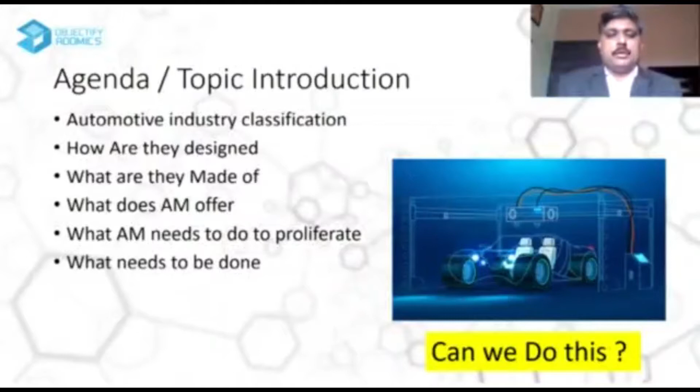In the next 20 minutes, we would be discussing what are the demands of the automotive industry, what does AM offer, what are the gaps, and how we can overcome these gaps.

To understand the requirements better, here we have shown a classification of the industry. This is a non-conventional classification where there are three segments: mass market, luxury market, and sports. This classification can be applied to industries from bikes to trucks. However, examples of cars are shown as it is easy to relate with them.

Each segment has its own requirements, and luxury market and sports requirements are more amenable to 3D printing. However, the mass market is where the volume lies. Hence, we would be going in detail into the mass market industry.

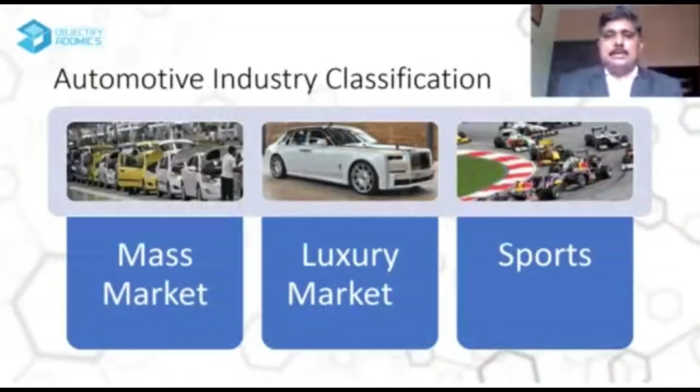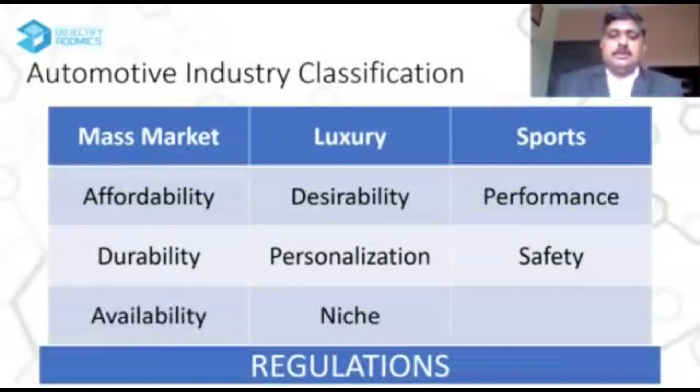These requirements shown here for each segment are applicable to all industries. However, if we pick the top three for mass market, they are affordability, durability, and availability. The whole industry is regulated, and any new designs or changes need to meet these regulations, both prevalent and upcoming.

To deep dive into mass market cars, how is affordability ensured? It is ingrained in the design and is ensured by exploiting the economies of scale, where high initial costs are distributed over larger volumes. Availability is ensured by rate of build, which is in multiples per minute.

If we take the example of the car industry in China, 46 cars per minute are produced. This is the build rate requirement. The build rate is supported by the supply chain model, where the parts are distributed over multiple suppliers who make these parts and supply them to the top tier OEMs.

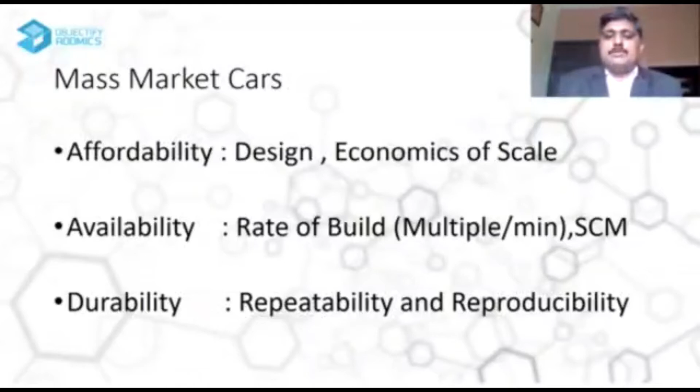Durability is ensured by the repeatability and reproducibility of the mass manufacturing processes. They deliver specifications consistently, which evolve over an iterative cycle of design and testing.

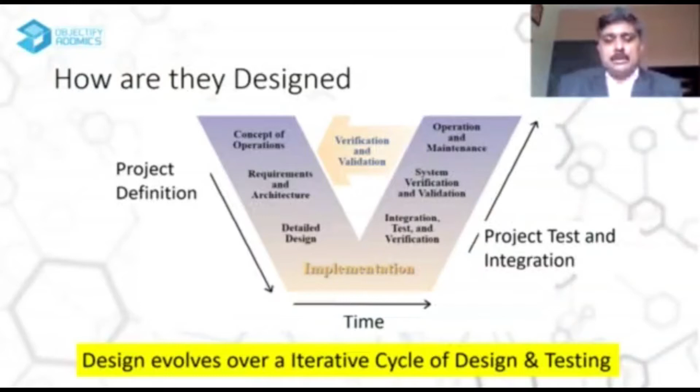In the project definition stage, the concepts of operations evolved are detailed into detailed designs. Parts are made as per these detailed designs and are tested at part level, subsystem level, and system levels. Finally, it is checked whether the concepts of operations are delivered, and the process iterates until then.

So what does an automotive vehicle constitute of? If we consider the classification as per weight, 80% of them are metal and 20% parts are plastics. Also, for plastics, the conventional materials like PA, PP, PC, ABS are not available in the 3D printing industry.

By this, what do we mean? The materials available in 3D printing are not exact representations of the properties of the conventional materials.

When we come to metals, these are primarily hot rolled or cold rolled sheets, castings, or forgings. They are primarily ferrous. Only in areas where weight saving is important and the loads allow, aluminum is used. The powder metallurgy and the composites have applications in very niche segments of high-end vehicles.

The final parts are made either by the stamping process or the machining process or the various joinery processes like welding or assembly, where the parts made are assembled. The key takeaway from the slide is that the materials and processes are aligned to the objective of fit-for-function parts, meeting the cost economics and numbers for the build rate requirements.

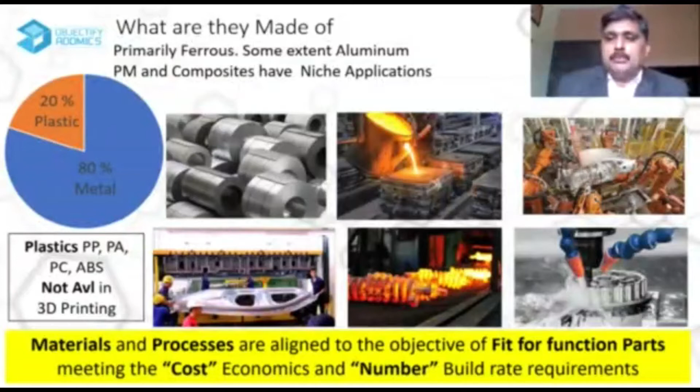Now, why are we looking at this slide? Over the next slides, you will understand how strong points of conventional engineering create constraints for DFAM. So what are the strong points? We start with legacy design.

If you look at these parts across all OEMs, the shapes are similar. They are customized as per the application of mounting and the loads. This concept of design rules, the processes that have evolved over multiple years, in fact thousands of years, have led to an intelligence which has created the design rules.

These design rules are used in terms of process constraints, and they govern the shape of the component to a greater extent. If you look at the SCM model, when the parts are distributed over the suppliers, in some cases suppliers also design those parts. So they own the IP of the parts.

So a car is necessarily an interlinked system of parts. And when these parts are owned by multiple OEMs, bringing in change becomes difficult because we have to interlink many stakeholders.

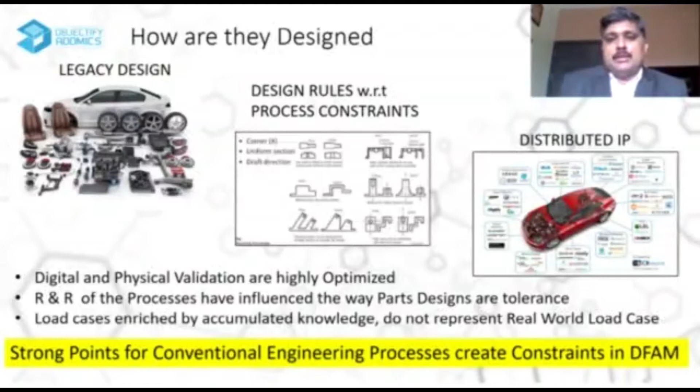So in summary, all advantages of conventional design have led to optimization in digital and physical validation. The load cases have got enriched, and you only check where there is a possibility of failure, so the load cases don't represent real world load cases. The tolerancing and dimensioning schemes are also made in sync with the process quality achieved by conventional processes. So there is an investment required here if this has to be made amenable for 3D printing.

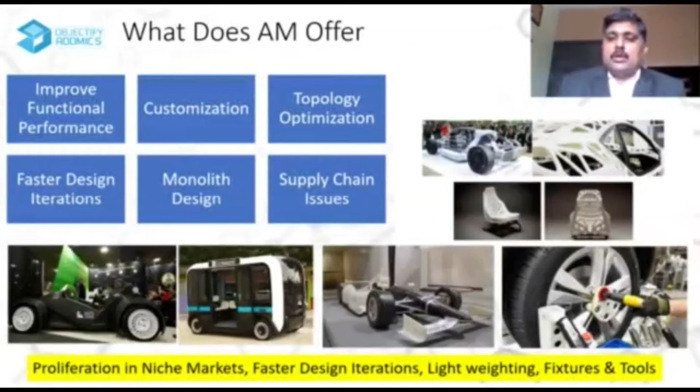For evolution of concepts of lightweighting, the additive manufacturing characteristics of topology optimization and monolith design help a long way in evolving the concepts. The tooling industry and the fixturing industry have adopted additive manufacturing, and so has the automotive industry, where toolings and fixturings are used.

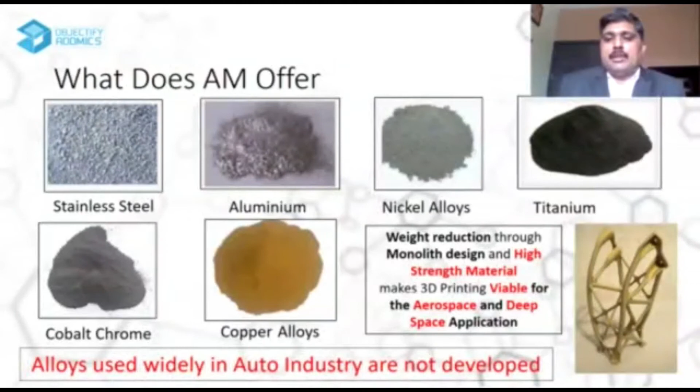If we look at what AM offers in terms of material and compare them with conventional materials, we find there is a huge gap. Most of the alloys used in the automotive industry are not developed in the AM industry. Why are high strength materials developed? These high strength materials aid in making monolith designs, which help in weight saving, which is a key cost and timeline driver for the aerospace and deep space applications. Hence, there are proliferations in that industry.

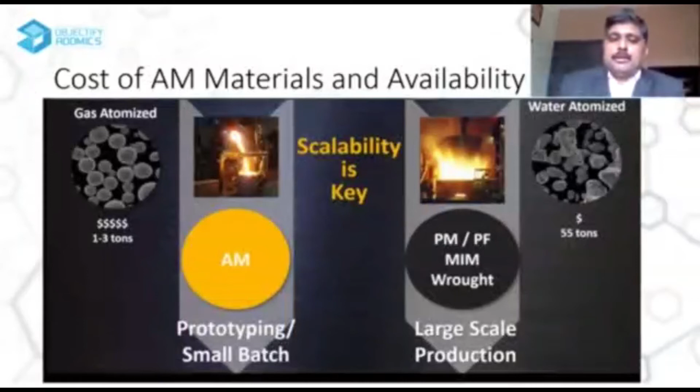If we look at the cost of materials and their availability, the process governs this. What do I mean? The current AM processes demand gas atomized powders, which are 5 times costlier than conventional powder metallurgy powders. Also, this gas atomization process is a prototyping or small batch process. So if the complete automotive industry shifts to AM, can this ecosystem support the number requirements? The answer is probably no. The high cost and high delivery ecosystem of raw materials needs to evolve into a more feasible model for the auto industry. The cartelization in powder manufacturing and machine manufacturing needs to go away.

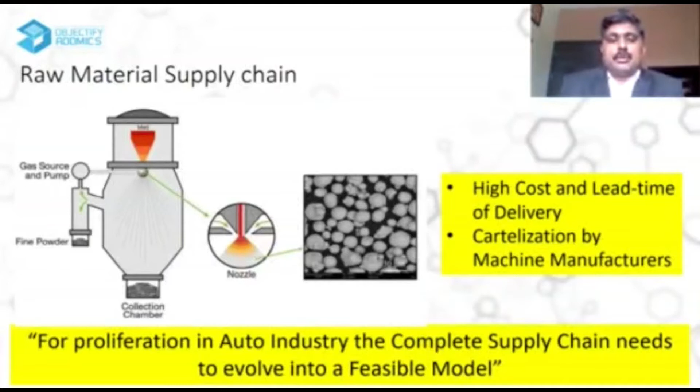If we look at the requirements of build rate and cost of the automotive industry, AM cannot meet these requirements currently. The initial costs of the equipments and their operating costs are very high. Also, the build rates are very slow because most of the systems depend on point-to-point curing by laser beam, which takes a lot of time. It takes hours to print the job.

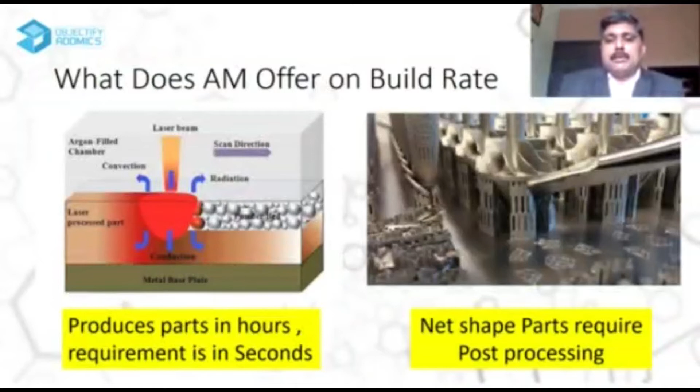Even after this, the parts that are made are near net shape and require extensive post-processing. This post-processing is a huge roadblock in 3D printing adoption. It breaks the digital chain that starts with digital design. In fact, it negates all the advancement in terms of unified software and the building of parts by multiple lasers, whether it's quad lasers, or some OEMs trying to bring in even 12 lasers. All that gets negated as finally you still have to do the post-processing.

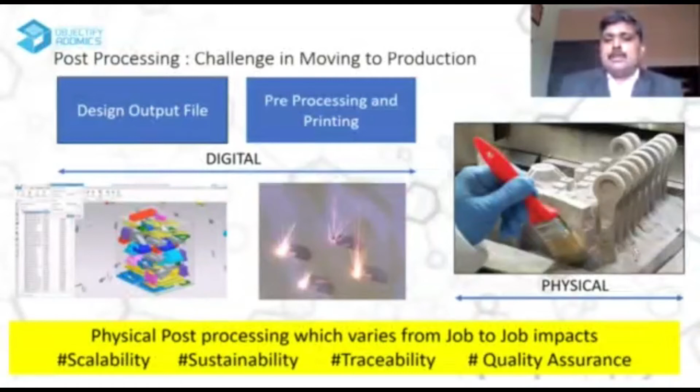This post-processing, which varies from job to job, impacts the scalability, sustainability, traceability, and quality assurance of the 3D printing process. The complexity of the AM process is also inhibiting its spread. In conventional design, you break down complex tasks into small tasks, whether in design or manufacturing, whereas AM success hinges on making complex parts.

These complex parts are made by complex processes. These current processes are highly complex and subject to even small variations in variables like powder quality, temperature, inert gas environment, build resolution, support structure, and so on. The complex part made by complex processes needs extensive testing and verification. The space and aerospace industry are aware of the extent of qualification they need to do for using these parts. Further, this qualification itself, once done, is subject to the machine, material, and build process.

There needs to be a huge investment in this to bring in universality. What do I mean by this? Suppose you have a part design and it is made by a particular process in USA, and if it is made by the same process in India, we should get the same result irrespective of the machines used. The complexity further increases by the need of different softwares at each stage. The unified software system needs to evolve to make the ecosystem feasible.

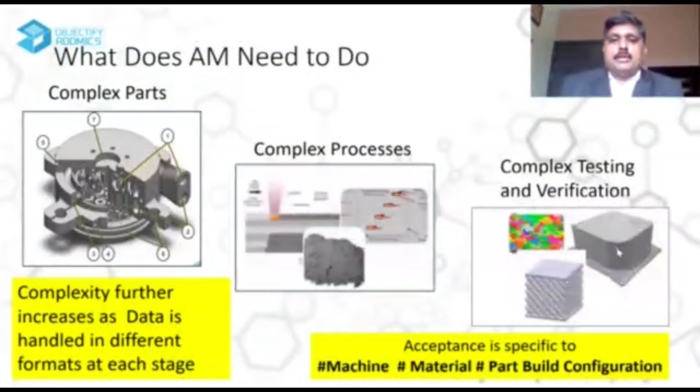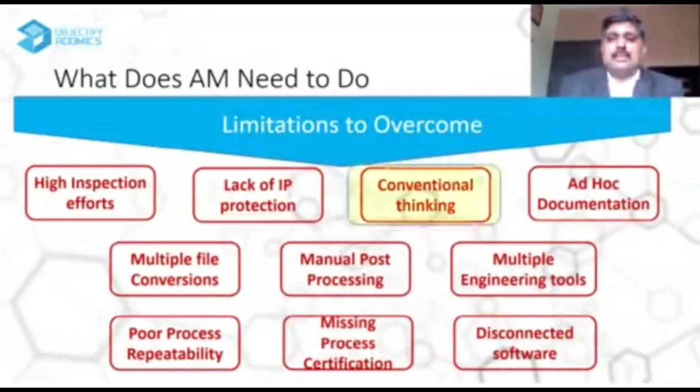In this slide, we are seeing what the AM industry needs to do. You must all be familiar with this slide. However, I would like to bring your attention to one factor: overcoming conventional thinking. This conventional thinking change needs to start with design. The design processes that have evolved over centuries need to change and need to adopt the bionic design approach.

So this sort of things are possible. Now this bionic design is non-intuitive. There are various ways in which we have done this, out of which two approaches are top-down approach and bottom-up approach.

In top-down approach, we find something in nature, characterize it, and then try to use it in the industry. In bottom-up approach, we characterize a use case in the industry and try to find similar use cases in nature, and then we optimize the system.

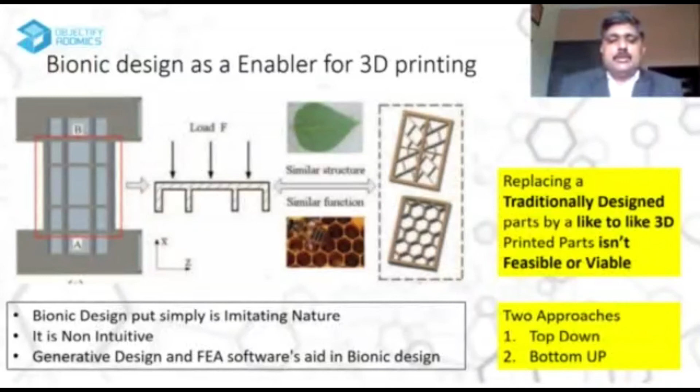There are various softwares which help in these processes, which are the generative design softwares and the FEA software that help in the bionic design. How does the success look like?

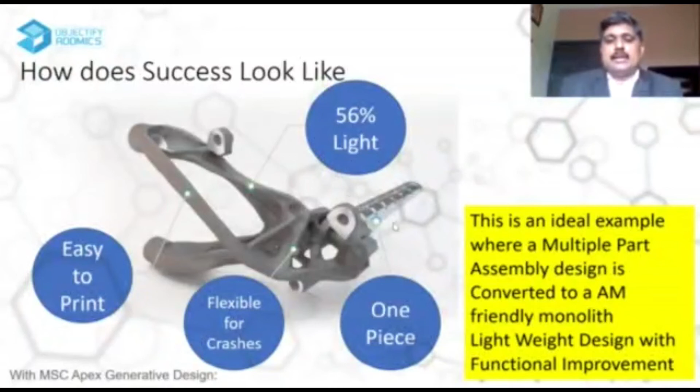Look at this part. This is a multiple part that has been converted into a single part. I have taken it from the MSC Apex site. Here you will see that the printing is made easy by the self-supporting angles. There is a functional improvement brought in by making crash-friendly structures. This is 56% lightweight, and this is one of the ideal examples of how generative design can help make AM feasible. Now this is one workflow of one of the software.

There are basic three steps. One is defeaturing a part. Second is applying boundary condition. Third is applying loads and optimization. Here we would look at the constraints in assigning the materials that arise due to conventional engineering techniques.

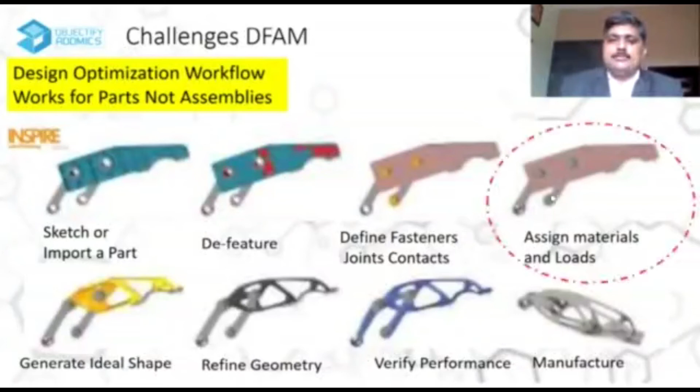So what are the inputs that you need to give to the software? These are all the inputs which cover the mechanical requirements, thermal requirements, electrical requirements, the usage requirements, also the 3D printing constraints, what are aesthetic constraints, and so on.

So is it possible to get this information easily in the conventional engineering designs? The answer is no. This information lies in separate softwares, in distinct data sets, and it is not very traceable to a particular part, as most of these are available at system level.

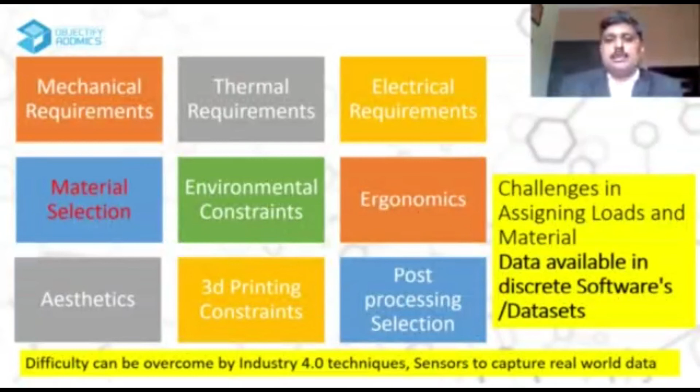Here, Industry 4.0 techniques can be used where you actually put a sensor in the real world and measure the loads where you actually require it.

This is one example where I am showing how the conventional design processes need to change, in a very simple application of dimensioning and tolerancing. On the left hand side is a conventional dimensioning and tolerancing, and on the right hand side is a bionic part.

Can you apply the same technique to this part? No. It will have to evolve as to how the specifications of the design can be communicated to the manufacturer, how the tolerances can be provided, how the tolerance stack-up can happen, and how the assemblies can happen. So this requires establishing a completely new method of communication, a language of communication.

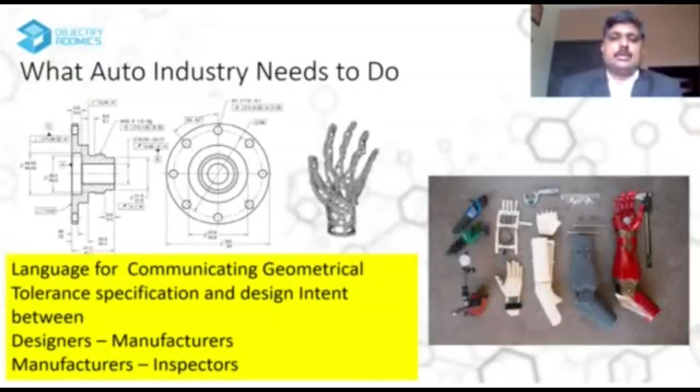To show the magnitude of this challenge, I've taken one example here. This example shows a wiring system of a particular object. This is an aeroplane. As you know, there will be many other systems that will be interlinked with this, and all need to work in sync.

If this sort of a system is to be characterized and then bionically optimized, it is not possible through the conventional engineering knowledge and the currently available, even the generative design softwares. So how will we overcome this challenge?

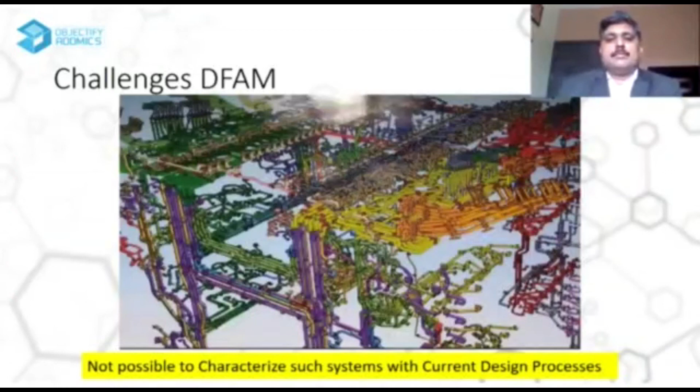It is here that the current trends of data analytics and AI need to come in. As I said earlier, when we have sensors in the real world and AI captures the data from the sensors and generates the design, it will open whole new avenues, and we can think of solutions which a human mind cannot think of. On the material front, recently there has been news that experimentations have succeeded in using water atomization for 3D printing powders.

These need to be taken ahead for industrialization. For the build rate requirements, there have to be innovations which have started, and I found out one application where light is used for processing in place of lasers. This process is 100 times faster. So more such innovations need to come forward.

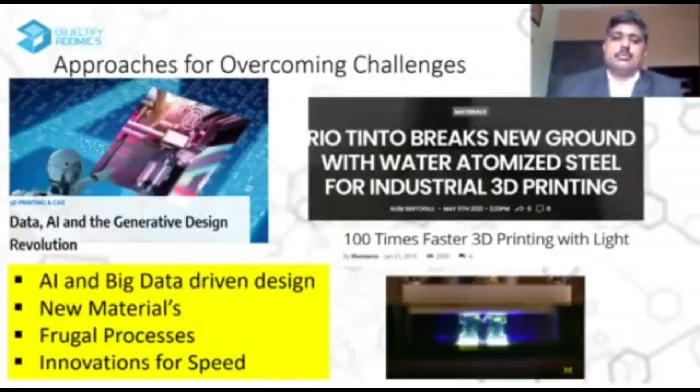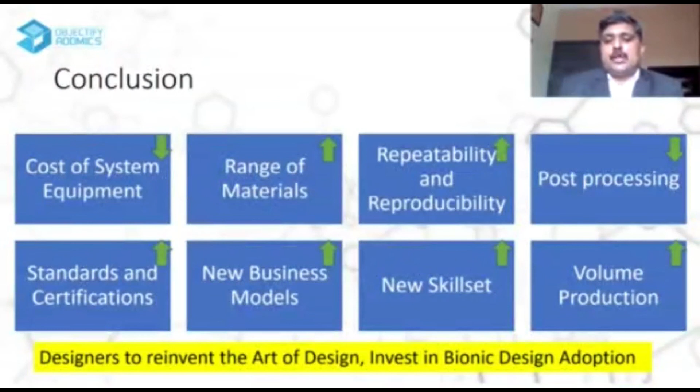So in conclusion, I would like to say that the cost of the materials needs to come down, cost of the systems needs to come down, the quality level has to go up. In fact, we need to make faster and better. But this can all be possible only when designers reinvent the art of design. They invest in adopting bionic design and pave a path for additive manufacturing.